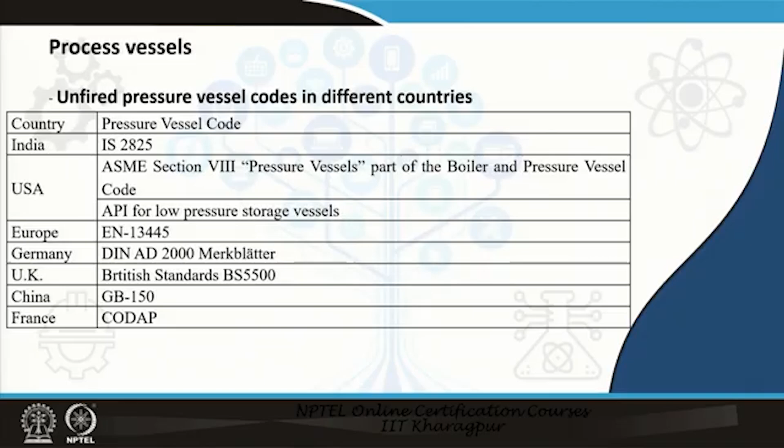Today we are going to talk on process vessels under module 4. So what we have here is, any process unit will have vessels, and as we noted in the first few lectures...

we have seen that normally, in order to keep interchangeability, ease of manufacture and some sort of standardization, is always required, and there are quite a few standards which are maintained for these vessels.

In India, the applicable standard is basically IS 2825, which is a code of practice for unfired pressure vessels. That means, if I have a furnace, it is not applicable, or if you have any vessel inside which there is a fire or a high temperature with a flame,

IS 2825 and the others are not applicable for that. We have in USA, which is also quite popular in India, ASME section 8, which is the pressure vessel section, or the boiler and pressure vessel code.

For the petroleum industry, or rather the hydrocarbon industry in general, you have the American Petroleum Institute codes for low pressure storage vessels. There are codes from API, there are various codes for this as well.

In case of Europe, Germany, UK, China and France, they have their own codes. You have the DIN, and these are basically the codes which you will always find.

Particularly in Indian context, you will find most of these, and most common will be IS 2825 as well as the ASME section 8, because quite a few equipment which we use in India are serving imported technology, and

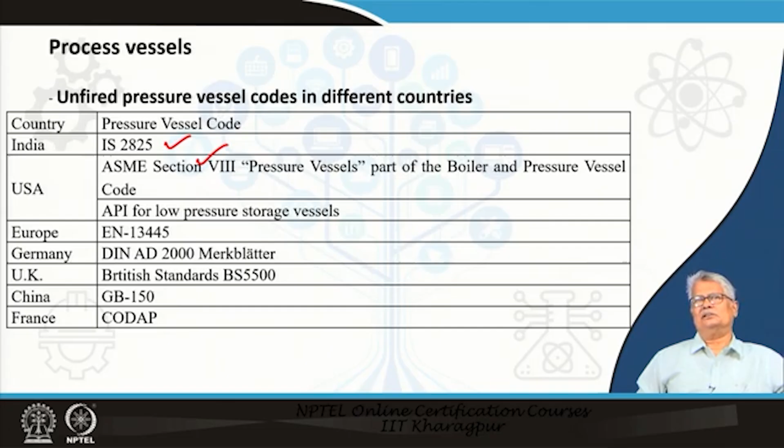So, these are the things which are covered by the unfired pressure vessel codes.

The moment we talk about a vessel, the vessel could be a vertical vessel or a horizontal vessel. You will also note that intuitively I am talking about a cylindrical vessel. The vertical vessel and the horizontal vessel, their features, let us list them side by side.

Whenever you have a high vapor to liquid ratio to be handled, for example flashing, it is in the drum, that means there is generation of vapor in the drum.

Normally you will be going for a vertical vessel, and wherever you have a large amount of vapor being generated, a vertical vessel with a tall vapor space is normally warranted and normally provided.

If you have a stable vapor liquid separation, that means the proportion of vapor and the liquid which is there is not much different.

That means you may have the liquid fluctuations and it could be frequent, but the separation between the vapor and the liquid is fairly stable.

When we do not want re-vaporization or remixing of the fluids, we often use a vertical vessel, because the moment they get separated, the liquid starts moving downwards,

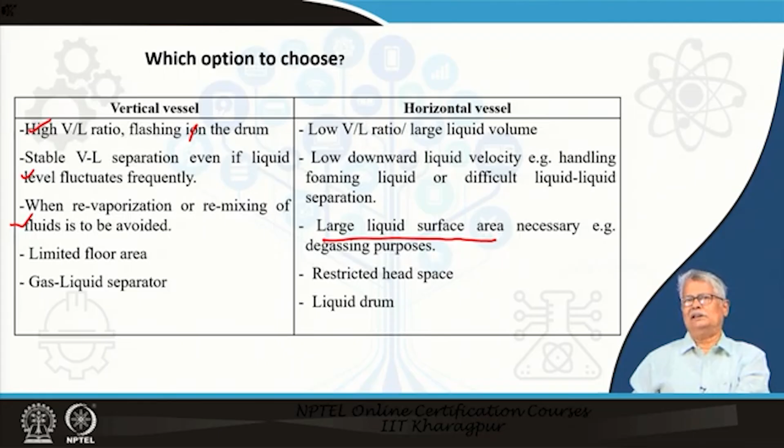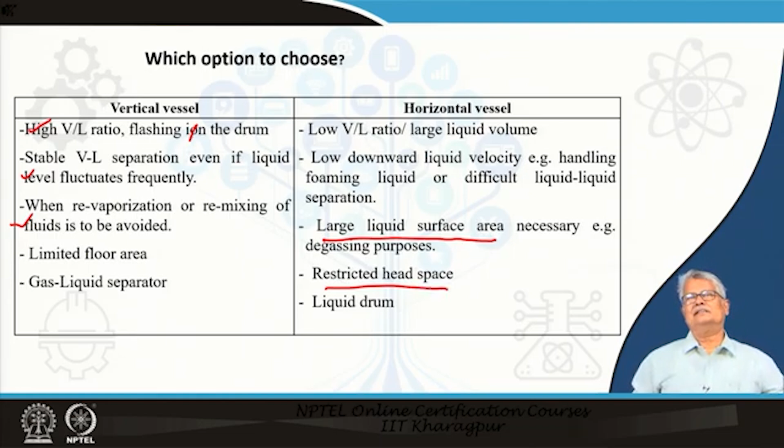Obviously, in case of a vertical vessel, the footprint was smaller. In this case, you have a bigger footprint, but it can still be placed in a location where you have restriction on the head space. A liquid drum is a typical application for a horizontal vessel.

Now let us have a look at the different components of a cylindrical vessel. Obviously, there has to be a shell. The shell thickness is determined as per the code and the material which is chosen.

You will require dished ends or closures, which could be hemispherical, semi-elliptical, torispherical - which is a very common shape of the head - conical, for example cone roof tanks, or toriconical as well. All these shapes are defined in codes, whether it is IS 2825 or ASME.

Now, if it is a vessel, the fluid must come in and it must go out also. So you have to have nozzles there.

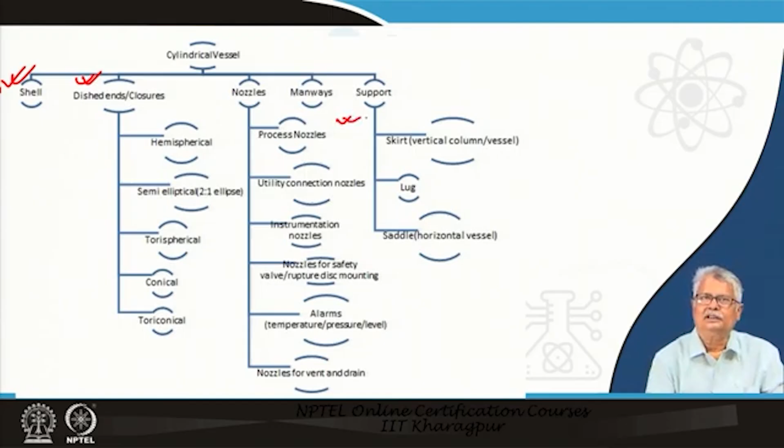So what do you have? You have nozzles for the process, nozzles for utility connections, instrumentation nozzles, nozzles for mounting your safety valve or rupture disc, and alarms for temperature, pressure and level. That means these alarms could be for high level alarm or low level alarm, but you require some nozzle to sense these parameters and generate the alarms.

Obviously, every vessel is to be provided with vent and drain. The other component of a vessel is the support.

The support could be a skirt support, a lug support, or a saddle. We will just have a look at these. Skirt is for tall vessels which provides a lot of stability. Lug support, also known as bracket support, depends on the code nomenclature. The saddle support is for horizontal vessels, and there is another type of support for horizontal vessels called a ring support.

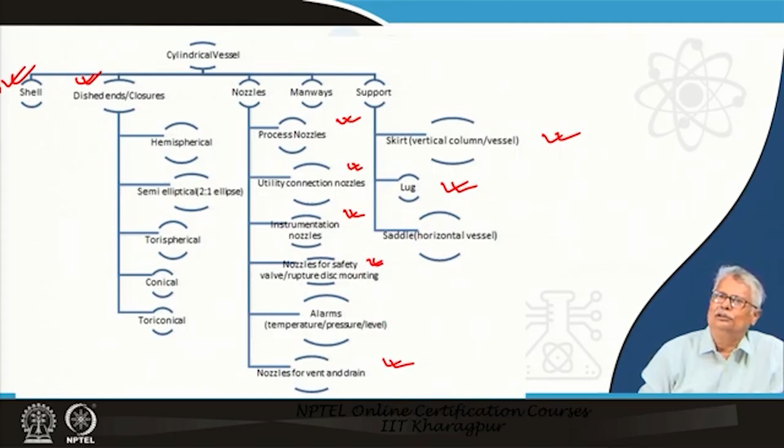Let us have a look at these. Before we look at the supports, let us look at the different nozzles, because one thing is very true: whenever you have to design a vessel, as a process designer, you are supposed to specify all the nozzle connections.

Whenever I say nozzle connection, it means the size of the nozzle and its location. Normally, in case of a vessel or a nozzle connection, the location would mean specifying its elevation with respect to a standard reference height, and also you have to specify the orientation.

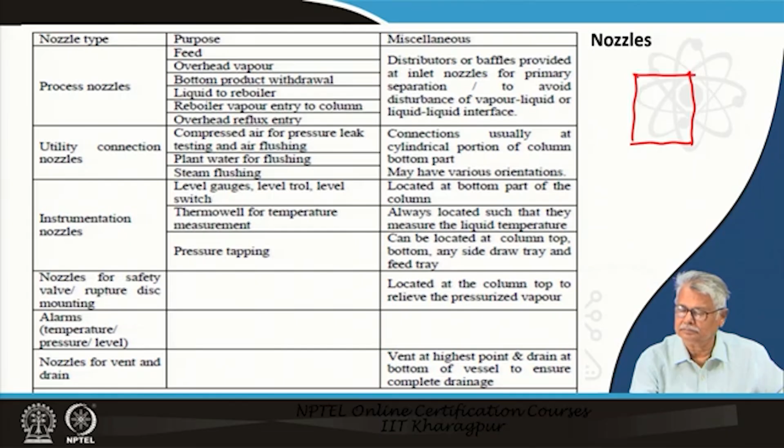For example, if I have a vessel here, fitted with a nozzle here, I have to mention the elevation of the nozzle, and possibly I will be mentioning it by writing it down here. I also have to mention what exactly is the location of the nozzle. So if I look at the plan of this, which is a circle here, this is the location of the same nozzle.

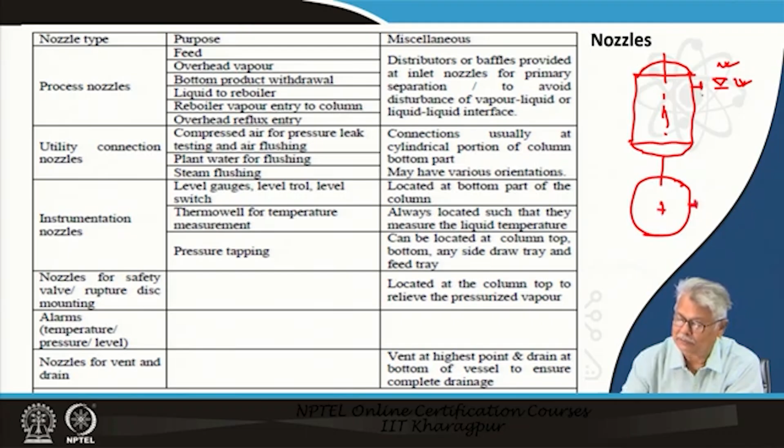So what I want to say is all nozzle elevation has to be mentioned and its orientation also has to be mentioned. Quite naturally, I will have a nozzle here possibly, I will also have a nozzle here. So this nozzle could appear here, it could appear here, or it could appear here as well. Wherever it is and whatever it is, the location of the nozzle has to be clearly mentioned, decided by the process designer and communicated for drawing it finally before it is sent to the fabricator.

Here we have a list of typical process nozzles: feed to a column, overhead vapor from a column, bottom product withdrawal nozzle. You have a liquid which goes through a reboiler in case of columns. Columns are also vessels naturally. Reboiler vapor entry to the column at the bottom, and the overhead reflux entry to the column.

So all these are process nozzles, but this is just a set of nozzles regarding the process. There could be even more, and you may have multiple numbers of such nozzles in a single vessel as well.

Normally, every vessel will have some utility connection: compressed air for pressure leakage checking and air flushing of the vessel. You often have a plant water connection which is primarily used for flushing. You have a steam connection for flushing the unit with steam.

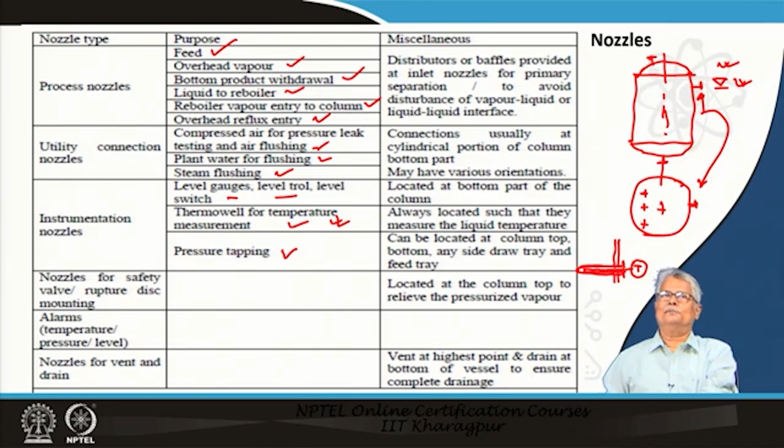You definitely will be having alarms. The alarms will be for temperature, pressure, or level, and in appropriate positions these are to be provided. The probes for these will be inserted through these nozzles.

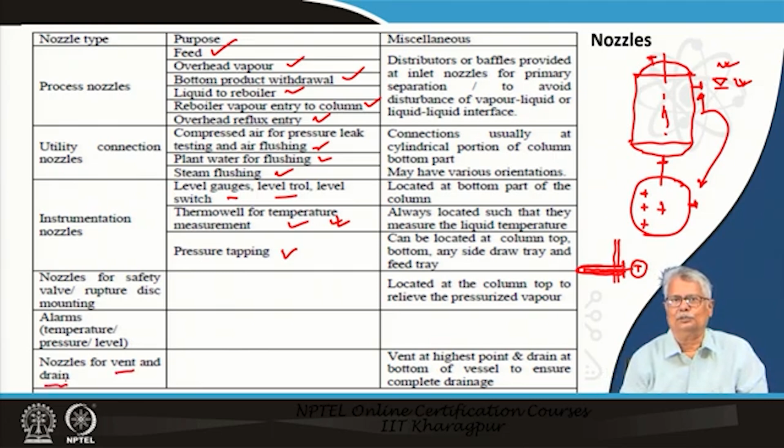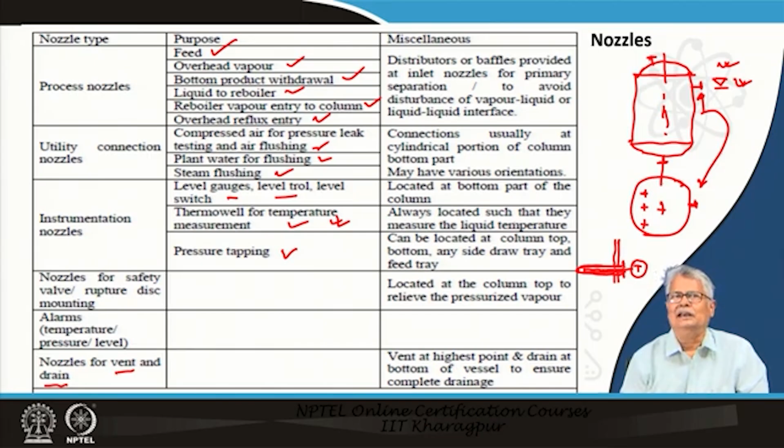All vessels must have a vent and they must have a drain also. Very often you will be listening to this term in industry: high point vent and low point drain. It simply refers to the fact that the vent is provided normally at the most feasible location at the highest point in your vessel, so that everything gets vented out from there, and the drain is at the lowest point in your vessel.

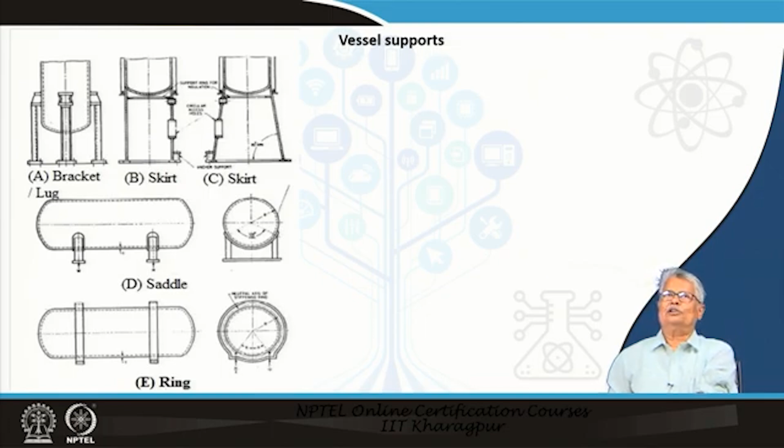So, about the nozzles, I was talking about the vessel supports. The first one is a bracket support or a lug support. The skirt support is basically something like this. If I have a vessel here...

I will have a continuation of this. In fact, it is not exactly a continuation, but an arrangement which goes like this - again a cylindrical support, a solid cylindrical support, which is attached here, and possibly what you have here is an access. It is an access through which you can have your bottom piping coming out. So, this you can see here - this is the opening through which your bottom piping may come out, or if you require anything else to be put in here, that can also be connected here.

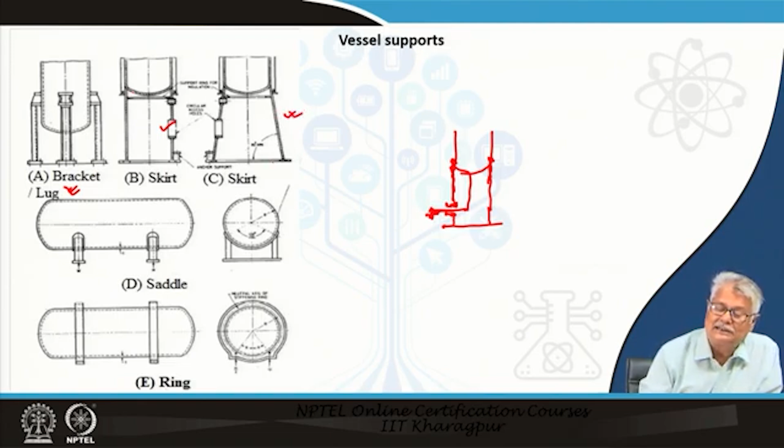The same thing you find here as well. The skirt in this particular case is meant to guard against tilting over of the vessel. So, you have a larger diameter at the bottom and a smaller diameter at the top.

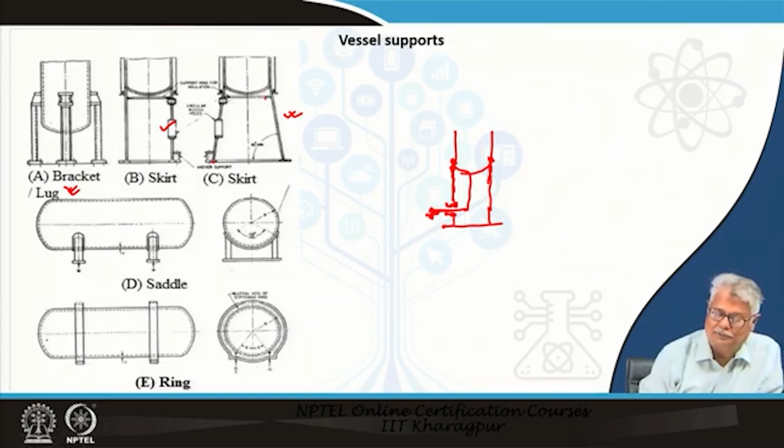You have a saddle support. This is basically the saddle, and the actual support is through these members, and there is a base plate in each case. And you have anchoring bolts here - you can see the anchoring bolts marked to fix this particular base plate to your foundation.

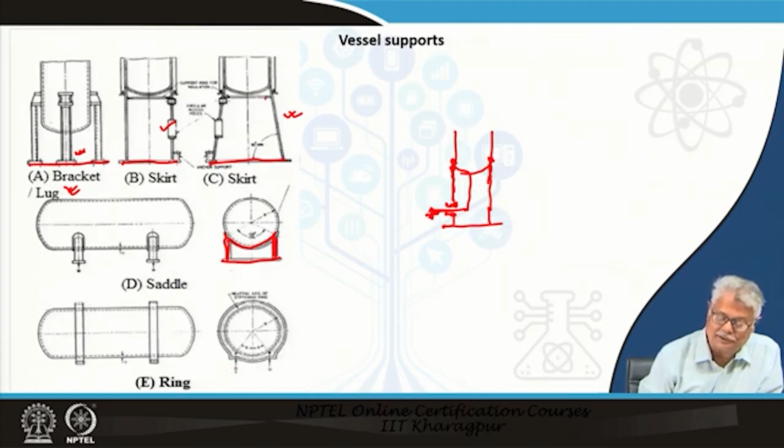In case of a ring support, the support is all through - that is why it is called a ring.

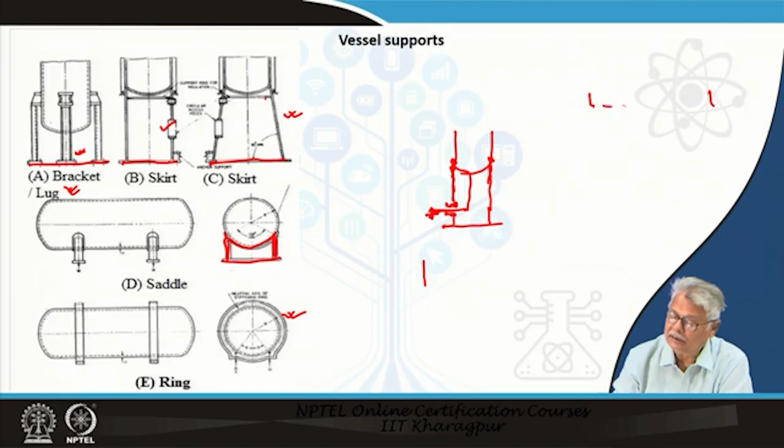I would just like to add one more thing here, it is also a definition. In case of heads, if you look at a head, you will normally have an arrangement which will look like this. You will have, this is the center line of the head, a portion which is cylindrical - it is called the length of the straight flange. That means the head, though curved as it appears, will normally have a straight flange length, and this part of it is cylindrical.

Then what you have is another zone where it is rather highly curved, and this is the radius which is called... it is called the knuckle radius. This is called the knuckle radius.

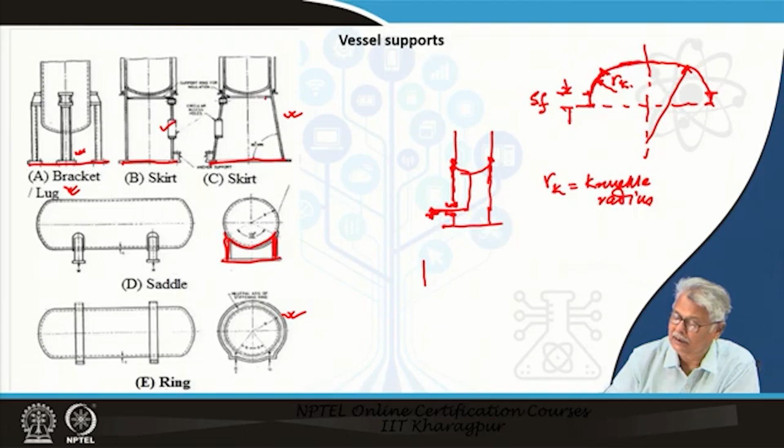What you have here - after the knuckle radius zone finishes, you have a less curved zone where the radius is the crown radius. It is obvious because it is the radius of curvature for the crown section.

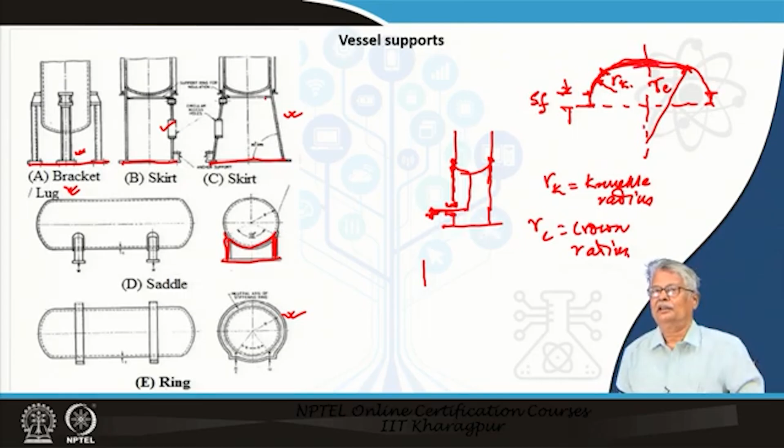So, what I would like to say here is, though it appears this way, you should not miss the straight flange length. You will also note one more thing - if I extend this, it is a tangent to this particular curved section, the knuckle, at this particular point. So this is a point where this straight flange is a tangent, and this is a tangent line.

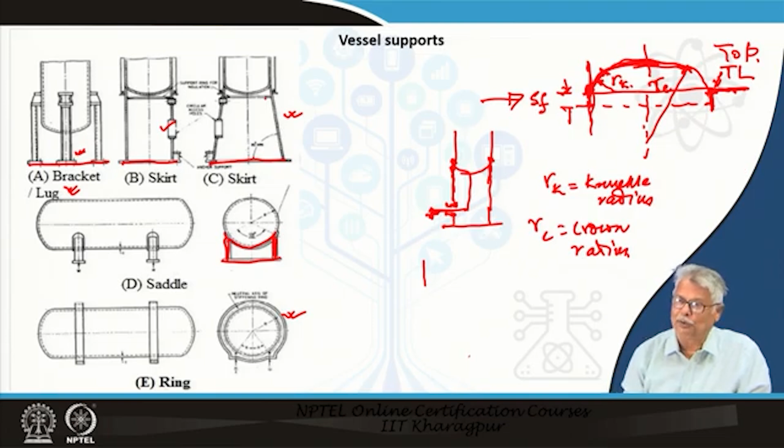When I am talking of the top head, it is the top tangent line, and there will be a similar thing for the bottom head, which I am going to call the bottom tangent line.

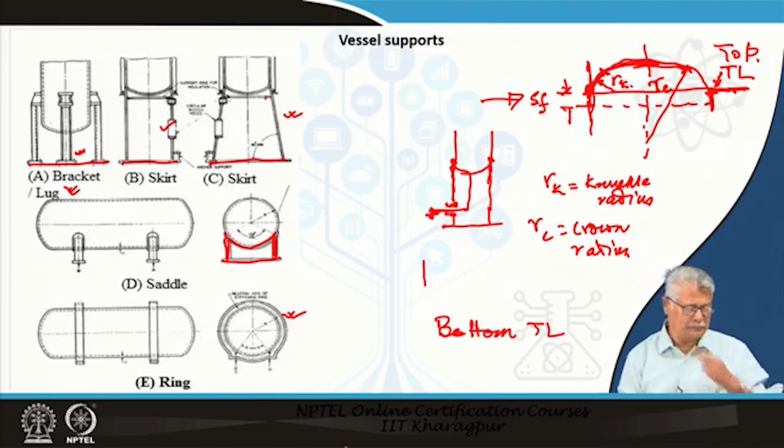Here we have a sketch. The head starts here, the head ends here. It is welded to the shell along this line, so this is the weld line.

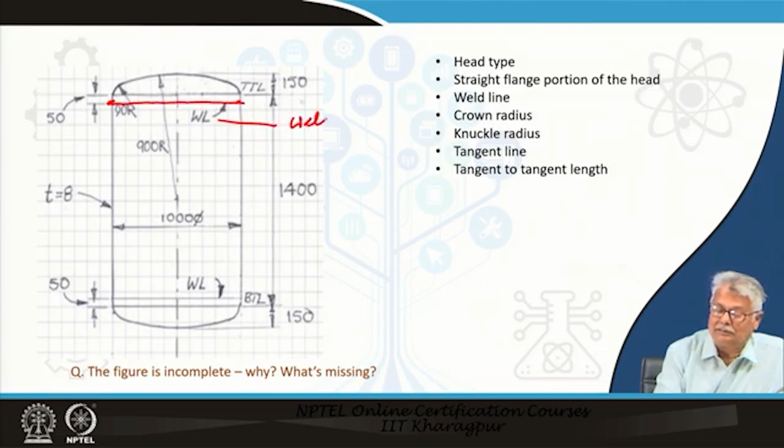This 50 millimeters is the length of the straight flange for my head, as well as in the bottom closure. The nominal diameter is 1000 millimeters here. I have shown you the bottom tangent line, and the bottom tangent line is ending here. The crown depth is 150 in this case, also 150 in the upper one.

Similarly the top tangent line is this. So we have another new term here, which we call the tangent to tangent length, which is the distance between the top tangent line and the bottom tangent line. I believe this will give you an idea of the nomenclature. The crown radius in this case is 900 and your knuckle radius is 90.

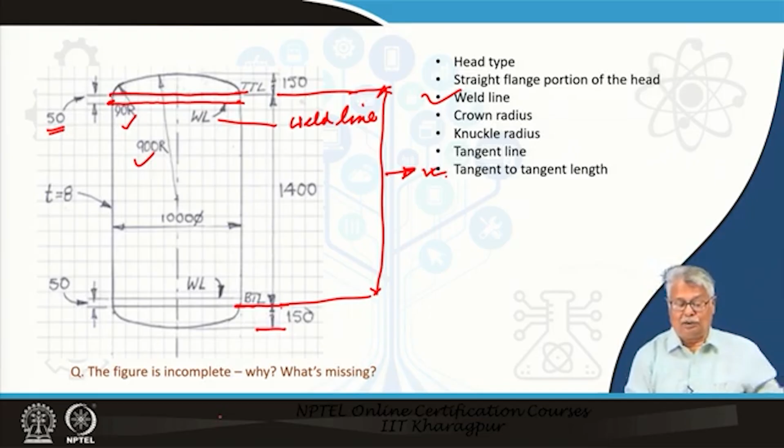Now I just have a question: the figure is incomplete. Why? What's missing? Let's list it out. Nozzles, support, anything else? Head type we have not mentioned.

So these have to be included, and in order to describe for fabrication, you are supposed to make a hand sketch of this along with the required number of views. In most cases, a plan and an elevation suffices, and you may have a general arrangement requirement if it is slightly more complicated.

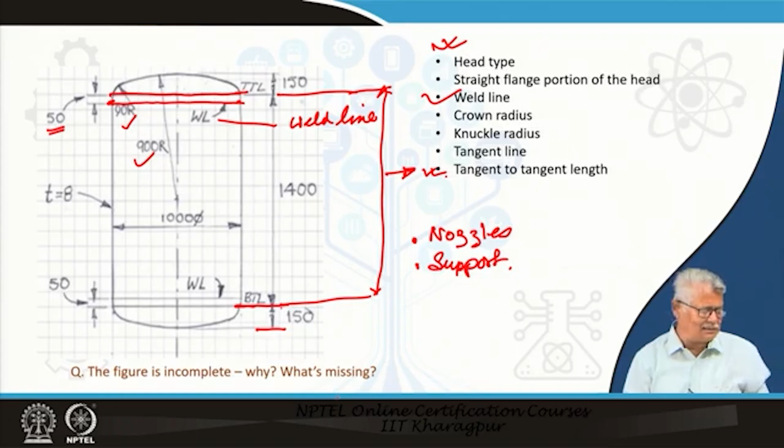You will also notice a few other things in this particular case. This is supposed to have both liquid as well as gas. So the BTL and the top tangent line are all marked here.

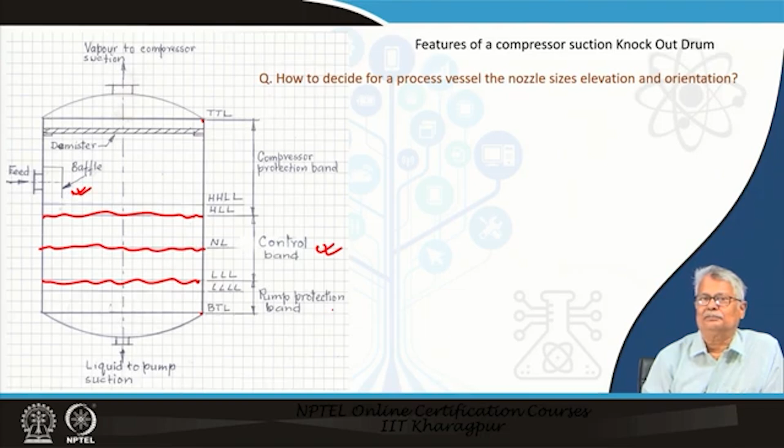Whenever your level comes to the high limit or the low limit, possibly you will have your alarms associated. But there will be a requirement for a trip of the compressor, so that if your level goes high, you may have to trip it, because you have to protect your compressor as equipment, and no liquid carryover goes into the compressor suction pipe.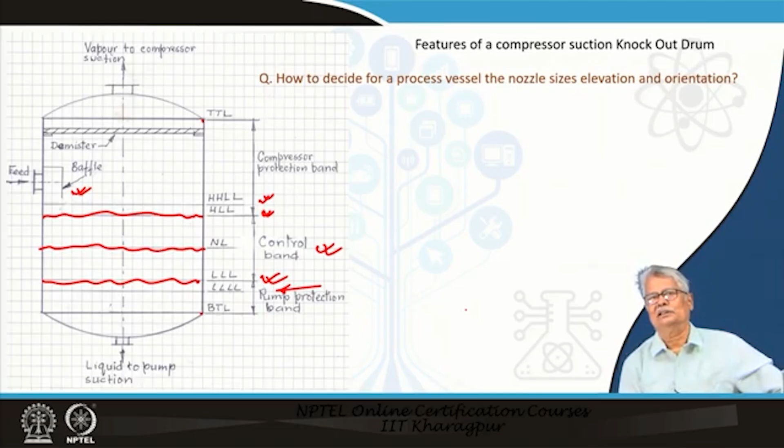Similarly, you may have a low level indicator here, which may or may not be associated with a trip. It all depends on the process which is taking the service from here.

Now what we have here is a similar thing. Here we have a column. Normally you will have a normal level. The level usually is measured by either a differential pressure measurement or any such thing, but normally you will require two tappings, one the upper tapping and the lower tapping. The upper tapping, if it is at 100% elevation with respect to the lower tapping, the mid is normally the normal level.

The typical alarm and the trips are at 80% and 90% level. The minimum level alarm is at 20 and the trip is at 10. So these are the relative locations of the instrument nozzles for level.

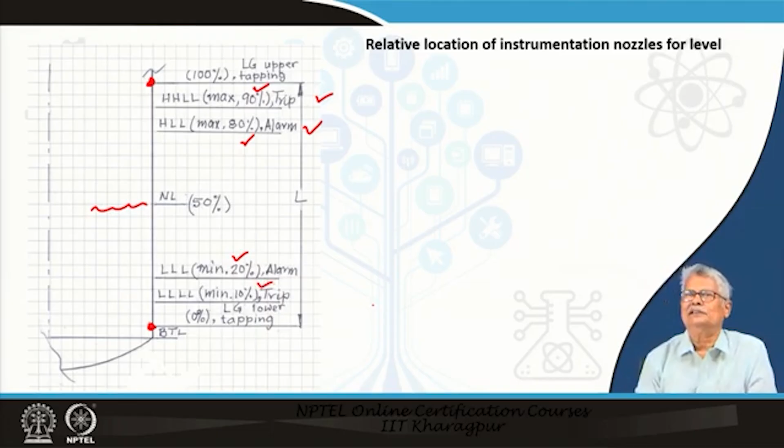Next comes regarding the nozzles, how do you know the sizes? For temperature measurements, you usually use 1.5 inch nominal taps, which is 38 millimeters. For pressure, you use either 25 or 38 millimeter taps. The differential pressures are either 19 or 25 millimeter. Utility nozzles are typically 2 inch, which is 50 millimeters.

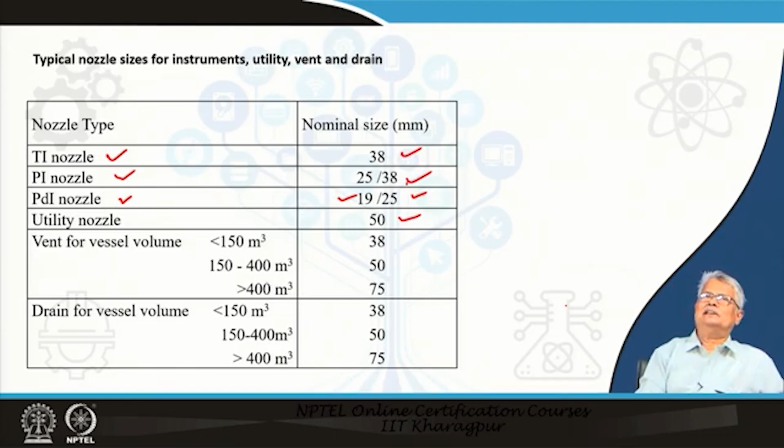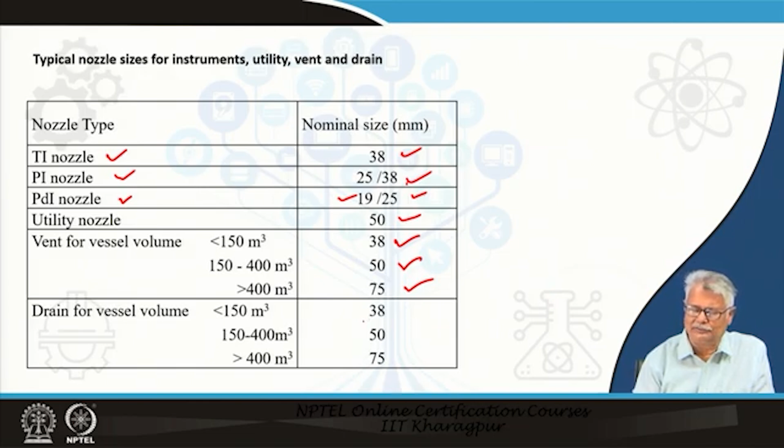The vents, the size of the vent depends on the volume to be vented, which is directly a function of the vessel volume. So you have either a 1.5 inch, 2 inch or even 3 inch vents. The drains similarly will be of different sizes for different nominal size of your vessels. It could be 38, 50 or 75. I believe that with this you have an idea of what to have for your instrumentation nozzles.

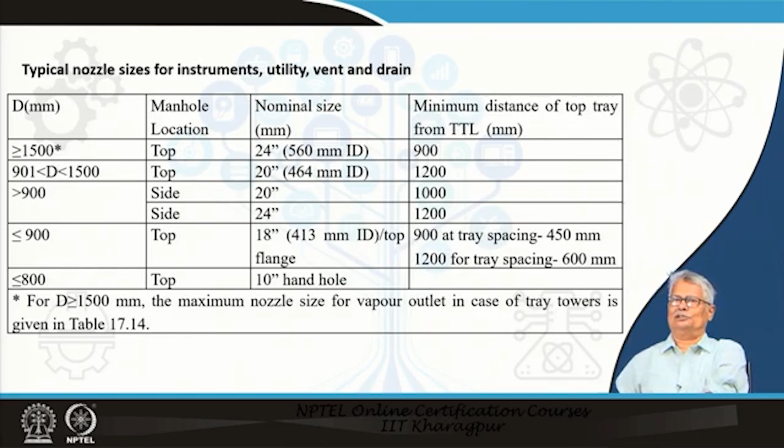But there is a question now: there are other nozzles that will also be required, that is for your process nozzles. Normally the process nozzle will match the size of your piping, and we have talked about the allowable pipe velocity, which is used for sizing pipes, and that part is already done and you already know it.

The manhole's location and the nominal size are important. So you mostly have the manhole locations at the top, and we also have talked about the typical sizes here, which are 18, 20, 24. And this is a suggestion for the typical location from the top tray if it is a tray column.

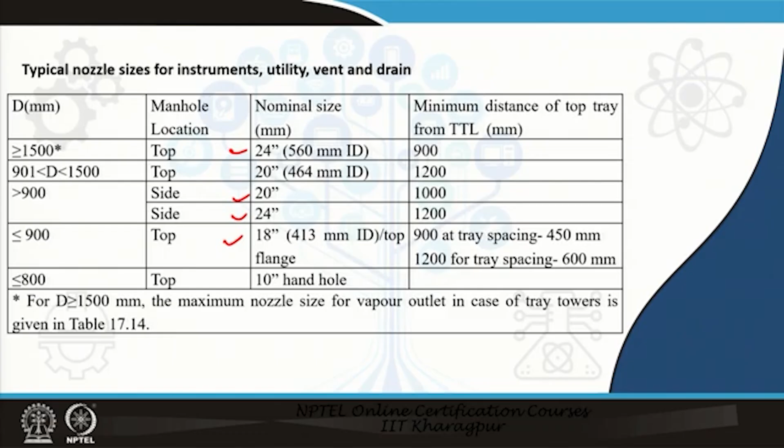I believe with this I have given you an overall idea of what a process vessel is, what features it should have, and it is time that whenever you go for your design, you first look at these, list out the process requirements, the functional requirements. Beyond that, you start making a hand sketch, locating the nozzles and all other features required for the functionality as well as safety of your vessel.